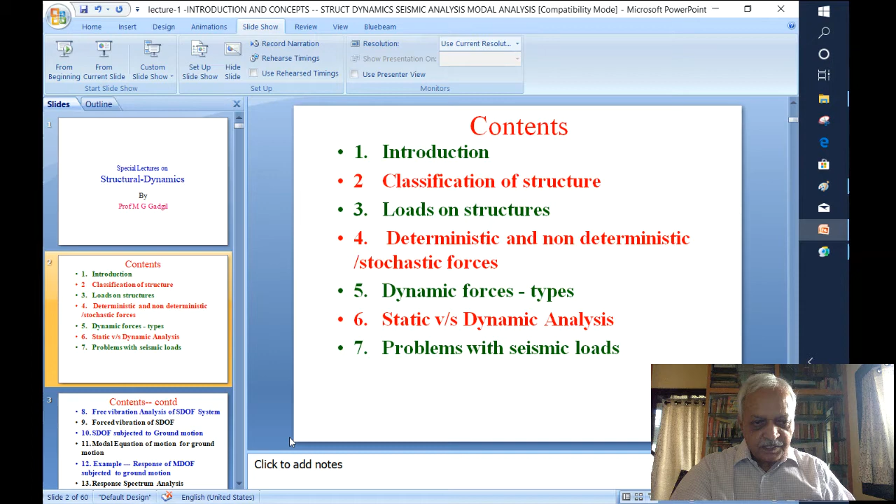My entire presentation today is going to cover the following topics. Firstly, I will give some introduction about the problem we are going to discuss. Then we will talk about classification of structures, the loads coming on structures, and deterministic versus non-deterministic or stochastic analysis of forces. We will discuss dynamic forces, the types of dynamic forces to be considered in structural analysis, and then static and dynamic analysis, the basic difference between the two.

The problem with seismic analysis will be discussed subsequently. Thereafter, a single degree of freedom system will be discussed in detail for its free vibration analysis. Then the forced vibration of a single degree of freedom system will be considered, which is an important step towards carrying out the seismic analysis of structures.

Then the single degree of freedom system subjected to ground motion will be discussed, which will later be extended to modal equations of motion for ground motion, that is, for a multi-degree of freedom system. A simple example will be considered for the response of a multi-degree of freedom system subjected to ground motion, wherein the analysis will be performed on the response history.

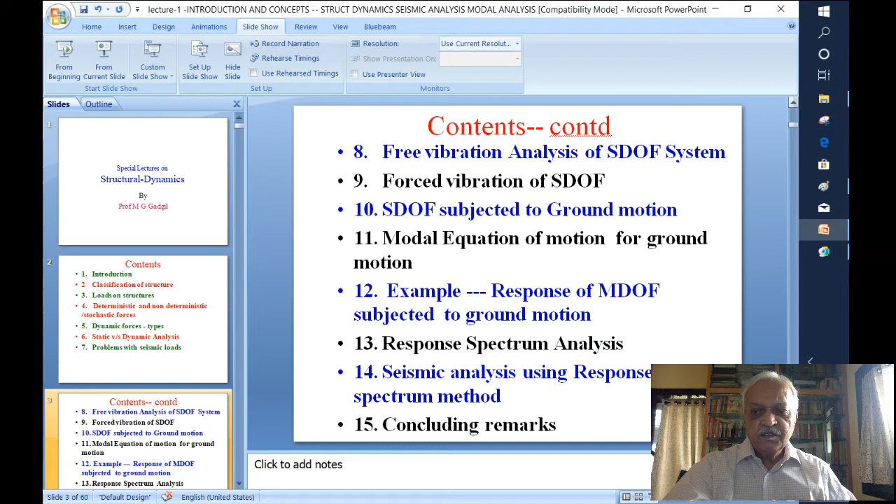Response history calculations and the response spectrum analysis will be introduced subsequently, and then seismic analysis using the response spectrum method will be discussed as a concept. There will be a problem solved completely using the response spectrum method as well as the response history analysis. So this is the overall guideline to be followed in the present lecture.

In the introduction, I am going to define the primary objective of structural engineering activity. The primary objective of a structural engineer's work is to plan, design, and detail a structural system which will safely carry the loads coming on it.

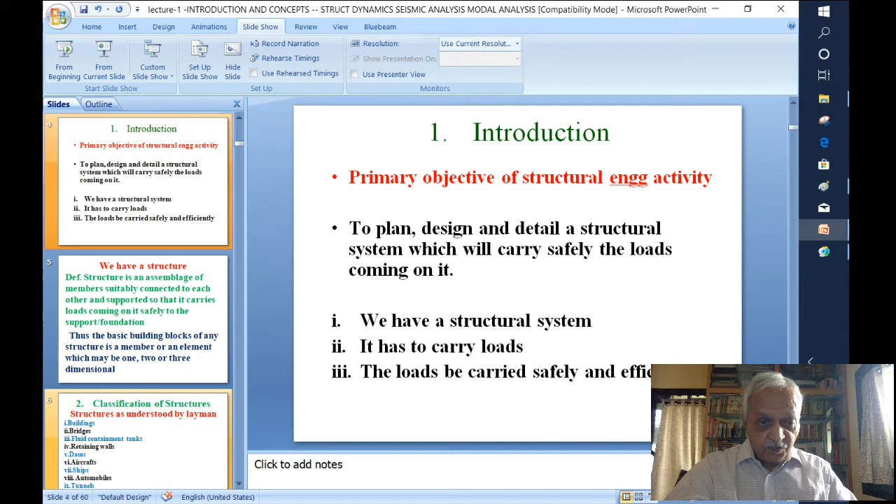If you look at this definition, it means firstly we have a structural system. Secondly, it has to carry loads. Thirdly, the loads have to be carried and resisted safely, so that the structural design meets the requirements of the end users.

Now, the first major activity of a structural engineer is dealing with a structure, so let us see what we understand by a structure. We say that a structure is an assemblage of members suitably connected to each other and supported, so that it carries the loads coming on it safely and carries the load to the foundation.

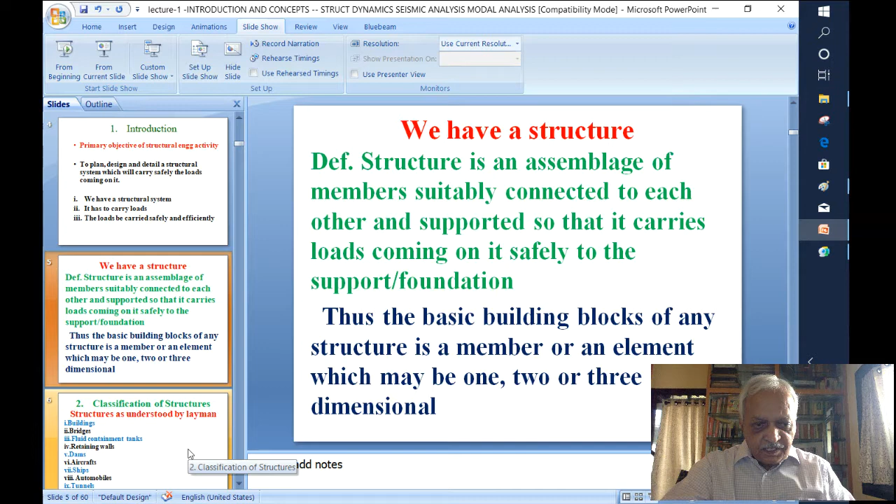This means the basic building block of a structure, whatever we have before us, is a member or an element which may be one dimensional, two dimensional, or three dimensional.

Now, when we consider the structure, a common man develops different images or understanding in his mind. For a layman, a structure would be buildings, tall buildings or medium-rise buildings, or bridges used for covering distance over roads or rivers, and then fluid containment tanks or water tanks.

Then we have retaining walls which are used to retain earth, and dams, massive structures which retain water on one side. Then we have aircraft which carry tremendous amounts of load and move from one place to another in air.

So the common man understands aircraft as a huge flying structure. Then there are ships, also understood as structures which float on water. Then we have automobiles mounted on wheels which carry loads, either in the form of cargo like truck carriers or oil tankers being transported on trucks, and then tunnels going through mountains for covering the distance between two places in the shortest possible manner.

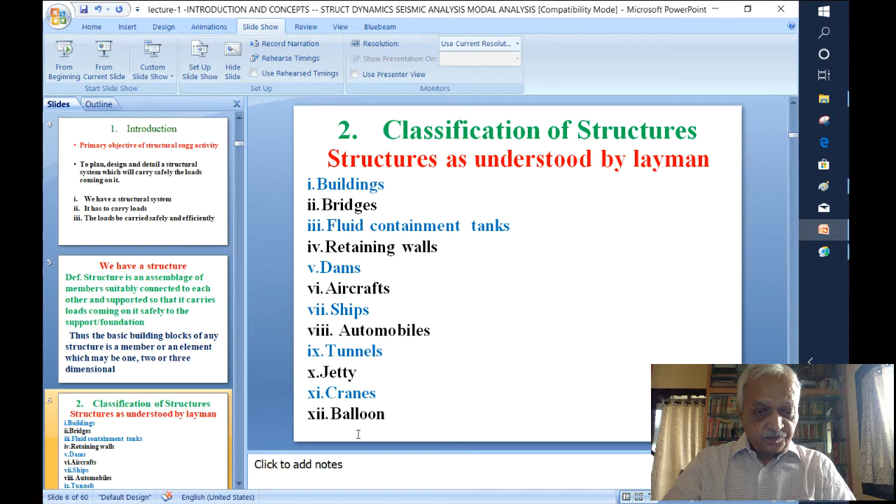So we have the tunnel with its lining, which must be properly designed to carry the loads coming from above, the soil above, and so on. Then we have the jetty, meant to berth ships at the shore. Then we have cranes, the tower cranes used in modern buildings, or the huge cranes in warehouses, and balloons or air-inflated structures, which have also been in great use over the years.

The classification of structure that we have seen is the way a common man understands it, while for an engineer, the structure carries different definitions or understanding.

An engineer may call a structure a beam, which is primarily a member subjected to transverse loads and carries bending moment and shear forces. Or a column, which is primarily meant to carry axial force and bending moments.

Then we have arches, which span large distances with aesthetic sense, carrying primarily axial force and some bending moment or shear force. Then we have cable structures, which are primarily meant to take only tensile forces.

Then we have trusses, either plane truss or space truss, where members are expected to take only primarily axial force. Then we have frames, either plane frame or space frame, where members are subjected to axial force, shear force, bending moments, torsional moments, and so on.

Then we have the floor grid system, which carries primarily the load in the direction perpendicular to the plane in which the structure lies. The floor grid system members carry bending moment, twisting moment, and shear force.

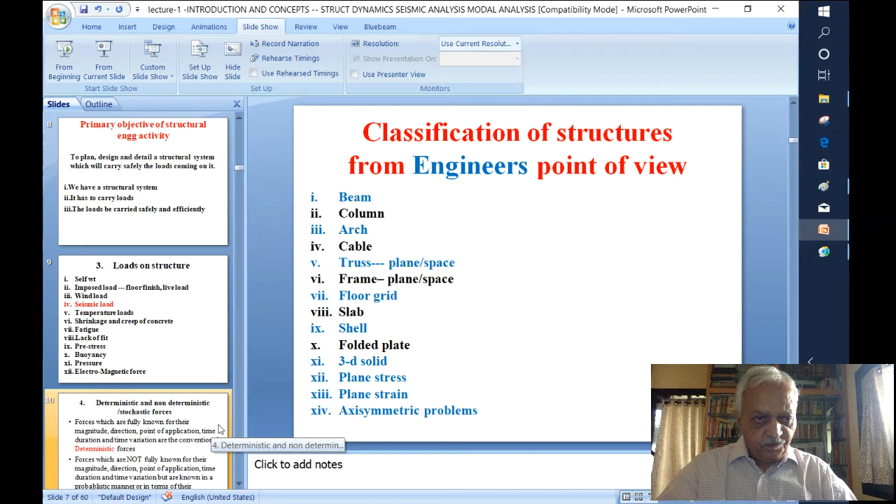Then we have three-dimensional solids, like foundation blocks for supporting machines or massive foundations below chimneys and so on. Then we have plane stress problems, plane strain problems, axisymmetric problems, and so on. So we see that for an engineer, the understanding of structure is different, while for a common man it is quite different.

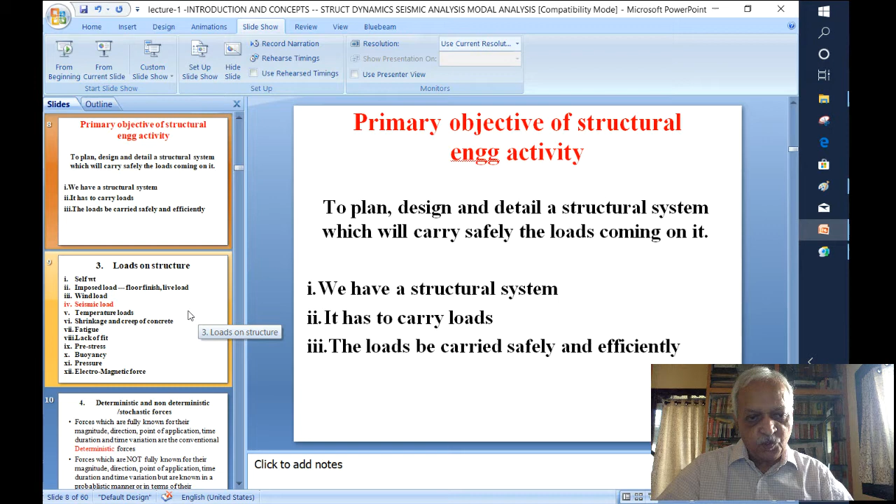Now, as far as the primary objective of a structural engineer's activity is concerned, we have a structural system, it has to carry loads, and the load is to be carried safely. So once we say it has to carry loads, let us see what kind of loads are expected on the structure.

The loads applied on the structure generally comprise the following list, though there might be a few more loads to be considered. We have the self-weight of the structure, which depends on the material being used. We have the imposed loads like floor finish or live load and so on.

Then we have the wind load, externally applied on buildings. We have the seismic load, generated due to disturbance at the ground level. We have the temperature loads.

Over the years, we see that the maximum and minimum temperature at any place varies by a wide margin. To that extent, the structure expands and contracts. So sometimes we have to consider the effect of this expansion and contraction in the design of the structure.

Then we have shrinkage and creep in concrete, which also develops additional internal forces that have to be considered in structures over a long period of time.

Then we have fatigue, which develops when rotating machines are supported by the structure, and due to the continuous development of alternating internal forces, the phenomenon of fatigue sets in, sometimes leading to failure of the structure.

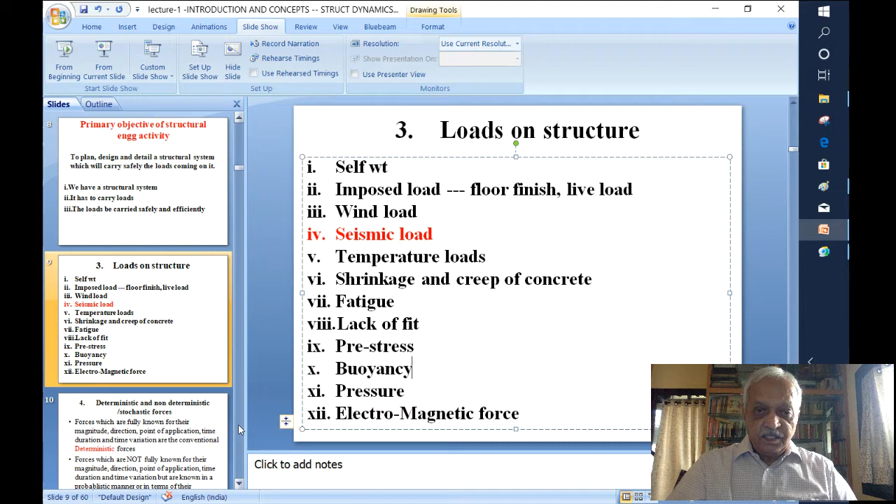And we have electromagnetic forces to be considered for structures like a transformer frame and so on, where a huge amount of current and the associated electromagnetic forces are developed.

Now that is the general description of the loads. Loads are further classified sometimes into two categories: the deterministic load and the non-deterministic or stochastic forces.

Deterministic forces are those which are fully known for their magnitude and direction, their point of application, the time duration, and the time variation. These are the conventional deterministic forces. So if everything about the force is known precisely, then we say that it's a deterministic force, and the analysis is then the deterministic analysis.

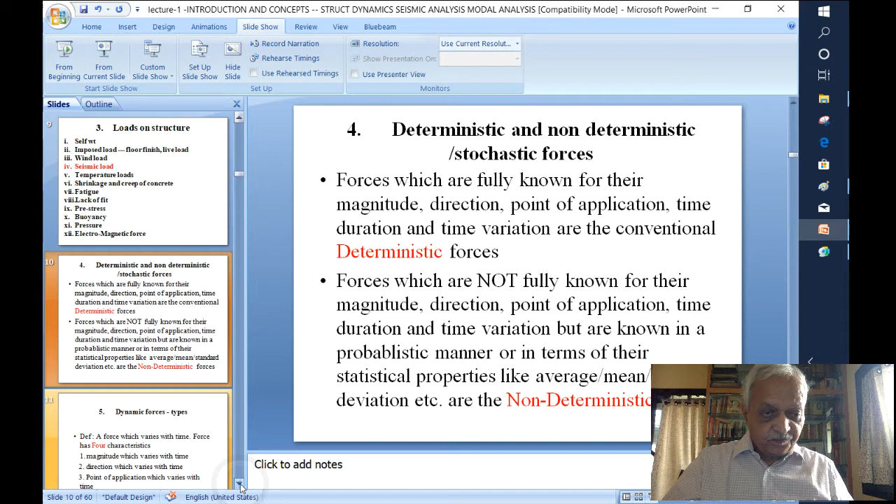Sometimes the force data is not precisely known. It is known in terms of some statistical properties. Forces which are not fully known for their magnitude, direction, point of application, time duration and time variation, but are known in a probabilistic manner or in terms of statistical properties like an average or mean or standard deviation, we call such forces as non-deterministic, and the analysis is then the non-deterministic analysis or stochastic analysis.

We further say that the forces we are considering, for most of the categories we have considered, are all static forces. But there are some situations where the forces are to be treated separately. A force which varies with time, we call a different type of force, because it induces a different phenomenon in the structure itself.

The force has got four characteristics. One, its magnitude, so you might have a force whose magnitude changes with time. The force has got a direction, so the force we are considering might be one whose direction changes with time. We also have to consider the force for its point of application. Now, if the point of application of the force also changes with time, like moving loads on bridges, then we say that is also a different type of force.

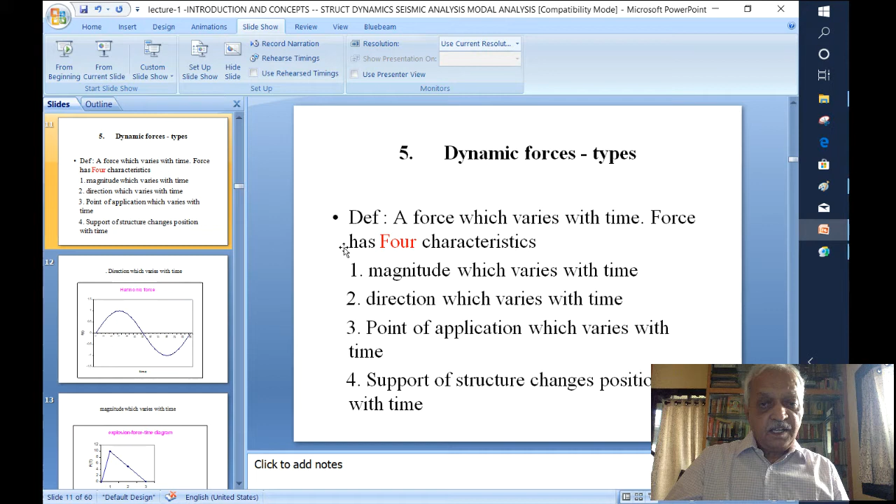And we sometimes have a situation where the support of any structure itself undergoes vibration or movement, as under seismic conditions, so we have to treat that type of force separately. These are the different types of variations we have to consider.

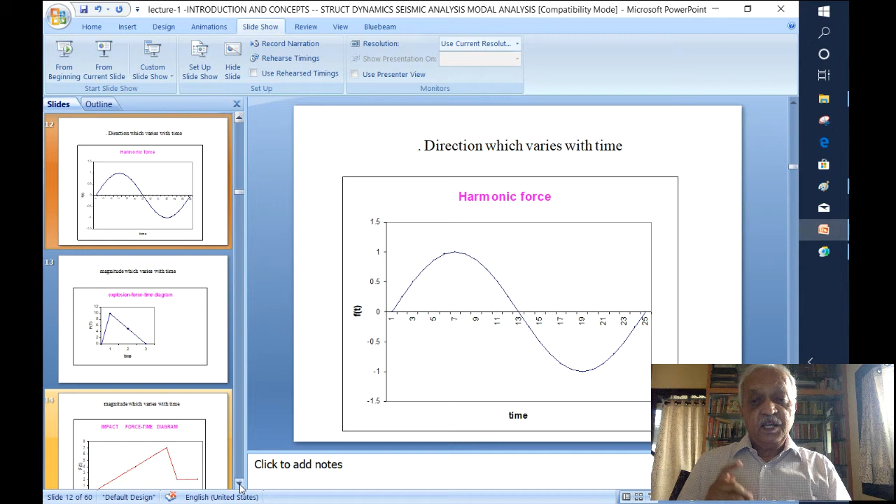Some of the force variations are now indicated. One is the harmonic force, which is developed many times due to rotating machinery supported on structures. The rotating machine can develop a force which changes with time in direction, but if you consider its component only in one direction, it can vary from a plus value to a minus value.

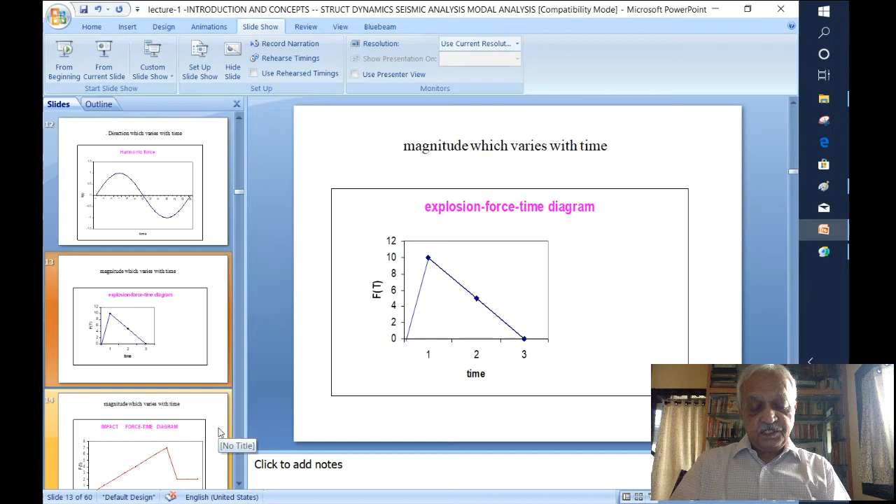Then we consider another type of variation, where the magnitude of the force varies with time, like an explosion. In an explosion there is a sudden buildup of force, and then a sudden drop in the magnitude of the force.

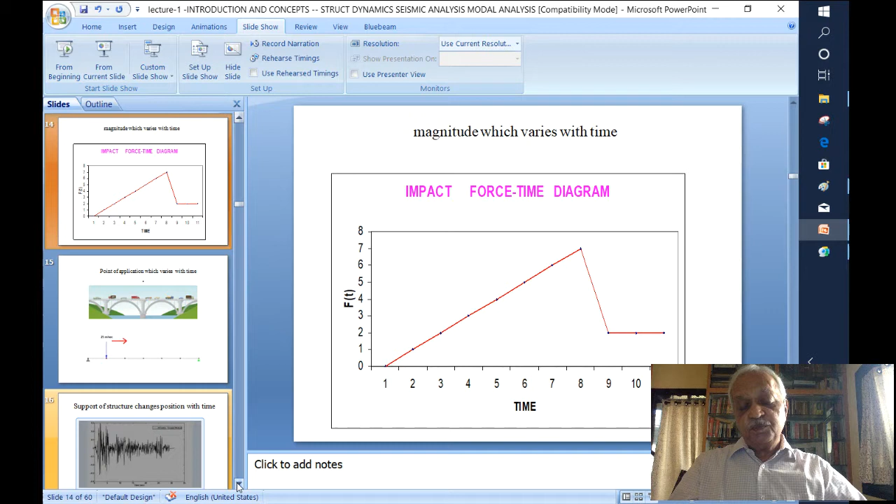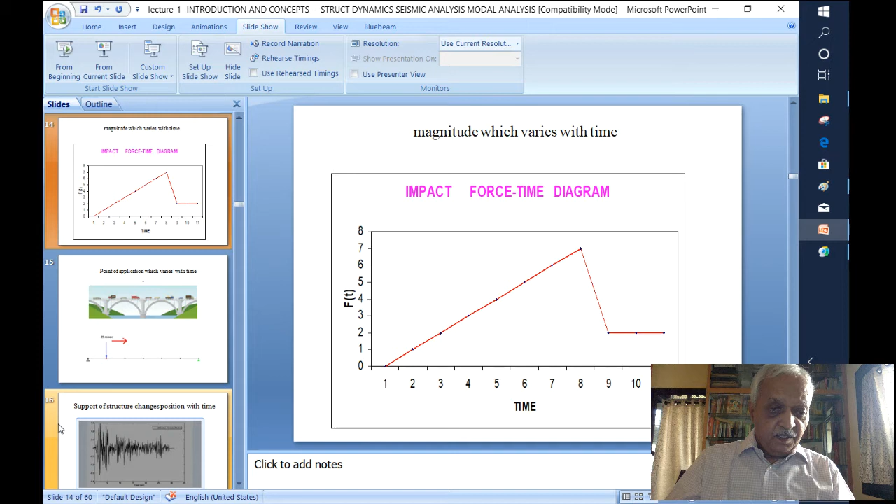So within a very short time, the entire process takes place, and the force varies with time in that fashion. Then we have another type of force which varies with time: the impact type of force. If a heavy object or a missile is thrown on a structure, it gives rise to a very large force within a very short time. Later, as the effect of that massive velocity of the falling object is reduced, it is only the weight of the missile which the structure has to resist. So we have a force which varies with time, but the entire variation is in a very short interval of time.

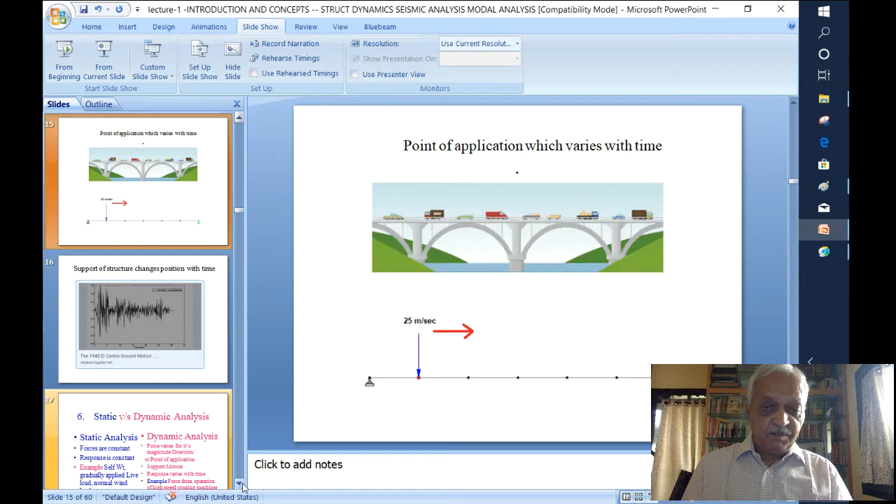Then we have a force which changes its position on the given structure: the moving loads. Now in moving loads on bridges, the vehicle continuously keeps changing position. So by the time the structure tries to develop enough reactions or internal forces, the position of the load changes. The result is that continuously the structure is subjected to displacements which are changing with time, giving rise to bending moment changing with time, and so on.

Then we have another type of force we have considered, which is the ground motion. So if you have a massive building resting on ground, and that ground itself shakes during an earthquake, that may give rise to enormous vibrations in the structure, and we will have to consider the effect of such vibrations in the analysis and design of the structure.

So far we have considered static type of forces or dynamic type of forces, the deterministic as well as non-deterministic. Now, once we say that forces can be static or dynamic, then the analysis will also accordingly be a static analysis or a dynamic analysis. In static analysis, as we see, the forces are constant.

The result of that is the response is also constant - your bending moment is constant, the shear force is constant, the deflection is constant, and so on. Examples of such types of forces are the self-weight, the gradually applied live load, or the normal wind load, which give rise to a constant force on the building, or if it varies very gradually so we don't have to consider its variation.

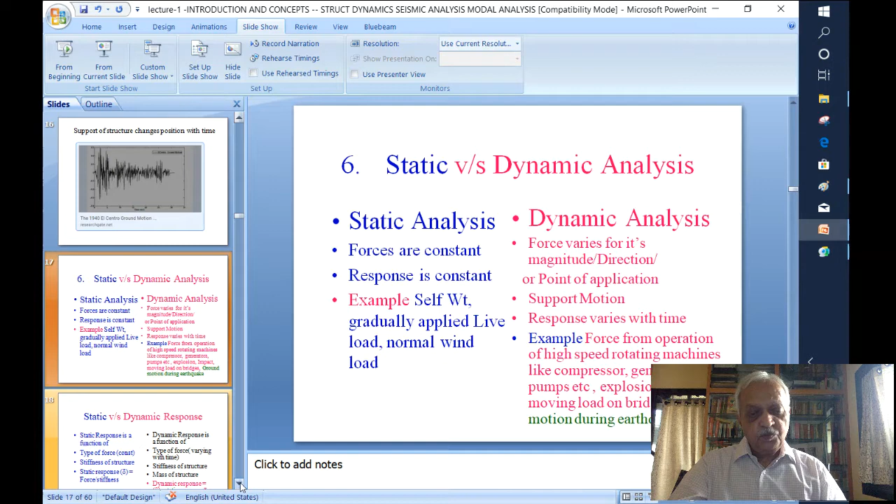Examples of such types of forces which we considered earlier are high speed rotating machines, compressors, generators, or pumps. Then we have explosions occurring in the vicinity of the structure, or impact, or in case of forging hammers, large amounts of impact forces developed at the foundation level. Then we have moving loads on bridges where the force changes its point of application continuously, and ground motion during earthquakes.

So we now see that static and dynamic analysis give rise to different types of concepts. The static response, when the force is considered constant, depends on the type of force - it may be UDL, or point load, or any other variation. The response of the structure depends on the stiffness of the structure. If the structure is very stiff, it will give some response in terms of displacements and so on.

The static response that we consider in terms of deflections is very simple for static analysis, and that is we have force upon stiffness giving rise to the static response of deflection.

In dynamic analysis, the dynamic response itself is a function of the type of force, that is how it varies - whether it's an impact type of force, an explosion type of force, or a harmonic force due to rotating machines. Depending on the type of force and its variation with respect to time, the response will change. The same force varying due to explosion will cause some response, but if the force is due to impact instead, it will give rise to another response.

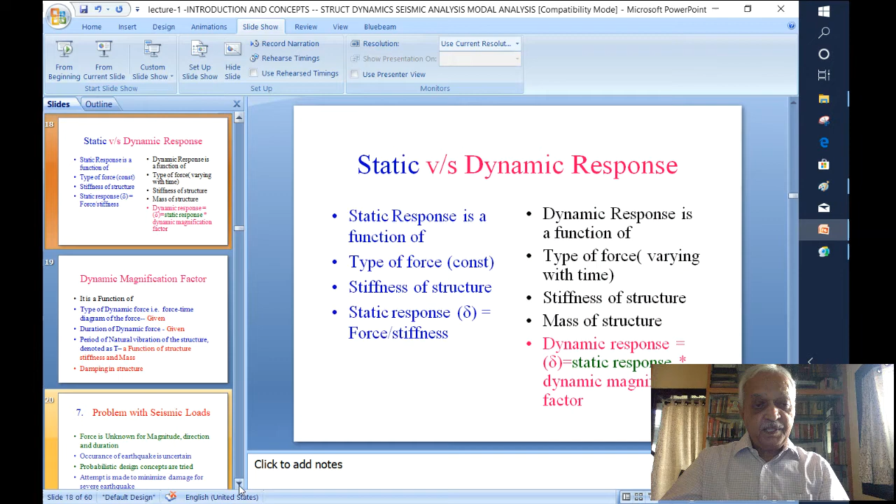The dynamic response, due to any dynamic force, will depend upon, firstly, if the same force is applied statically - there is some response generated by the structure - but if the force is applied dynamically, then the response gets magnified or modified. So the dynamic response is given by the static response if the force is applied statically, multiplied by a factor called the dynamic magnification factor. This dynamic magnification factor is the most important concept in dynamic analysis, because it indicates by what margin the response gets modified when considering the dynamic nature of the force.

The dynamic magnification factor depends upon the type of force - the same force applied as explosion, impact, or harmonic force will cause different dynamic magnification factors. Further, it depends upon the duration of the dynamic force. If the duration is too short, there is some magnification factor; if it is too long, there is another magnification factor.

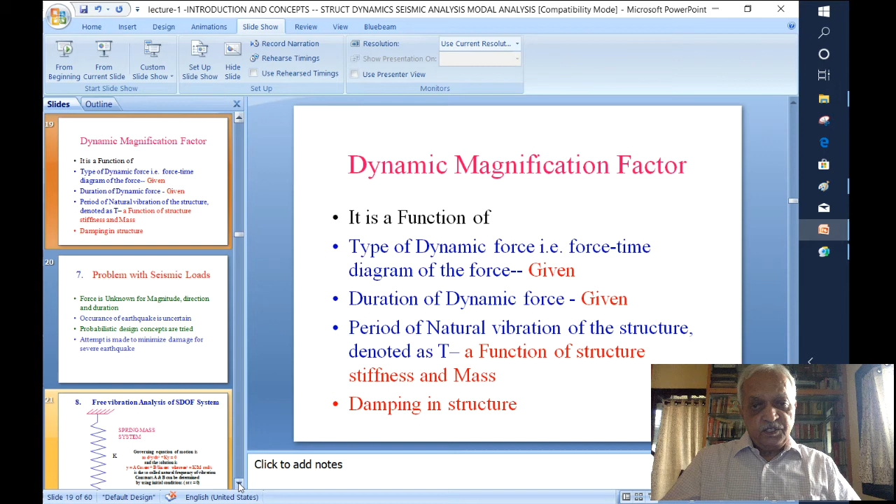It further depends upon the period of natural vibration of the structure, denoted as T, which is a function of the properties of the structure like its stiffness and mass. The dynamic magnification factor also depends on damping in the structure, which is the energy loss mechanism present in and around the structure. But we will not go into details, because many times its effect is small compared to an undamped structure that we otherwise consider. So that is all as far as the dynamic magnification factor is concerned.

Now we consider the force of importance for today's discussion, that is the seismic loads. Seismic loads are a very peculiar case of dynamic force. In case of all the loads we have been discussing so far, like an explosion, an impact type of force, or force generated by rotating machines, there is definite information about the force that we have to consider.

In case of earthquake, there is a lot of uncertainty. I don't know what magnitude of earthquake is going to hit the structure, in which direction the waves will be coming, and how long the earthquake will last. So that is all unknown. You have to only speculate or see the past history and take all those factors into account, then try to estimate what kind of force is to be considered. No precise information is available. The occurrence of earthquake itself is uncertain.

Sometimes during the lifetime of a structure, no earthquake might hit it, but nevertheless we have to keep a provision that if an earthquake really hits the building, it must withstand. So we have to consider the probabilistic method of design in this situation, as to what is the probability of the structure being hit by a very severe earthquake. We have to consider that, and the structure is to be designed accordingly.

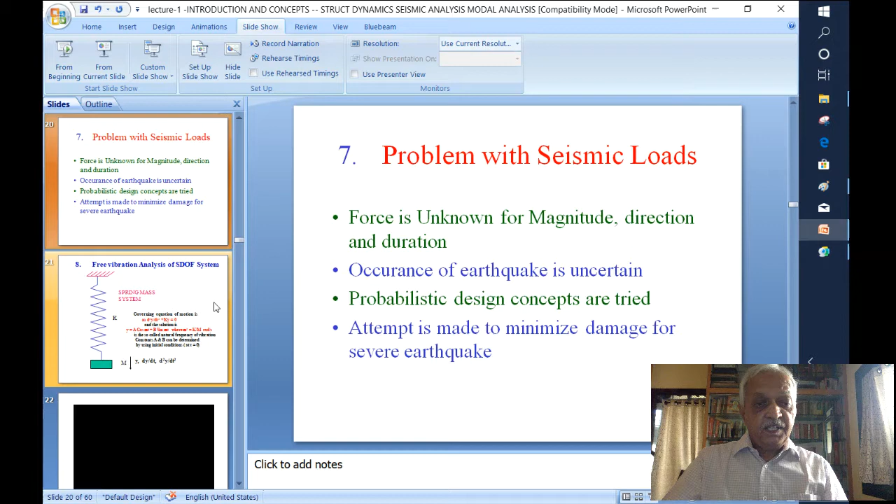We have to consider that the structure will generally resist certain intensity of earthquake in a safe manner. Some more severe earthquake can cause some damage to it, not leading to collapse, while other very severe earthquake might damage the structure to such a great extent that we may have to pull it down later and build a new structure. So our idea is always to see that minimum damage is caused during normal or moderately severe earthquake. The seismic analysis has got to be performed in a methodic manner, but the problems are quite different, and we have to consider probability of occurrence of earthquake, probability of saving the structure from complete destruction, and so on.

Having considered that, now let us consider the free vibration analysis of a single degree of freedom system. So we have this simple spring mass system. The spring has got a stiffness K, there is a mass M attached to it, and if this particular system is set into vibratory motion, we consider simple vibration of this spring mass system.

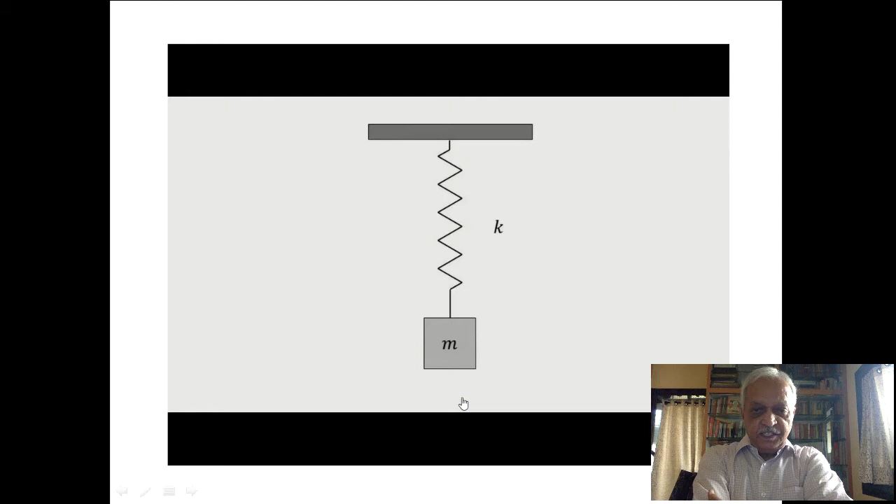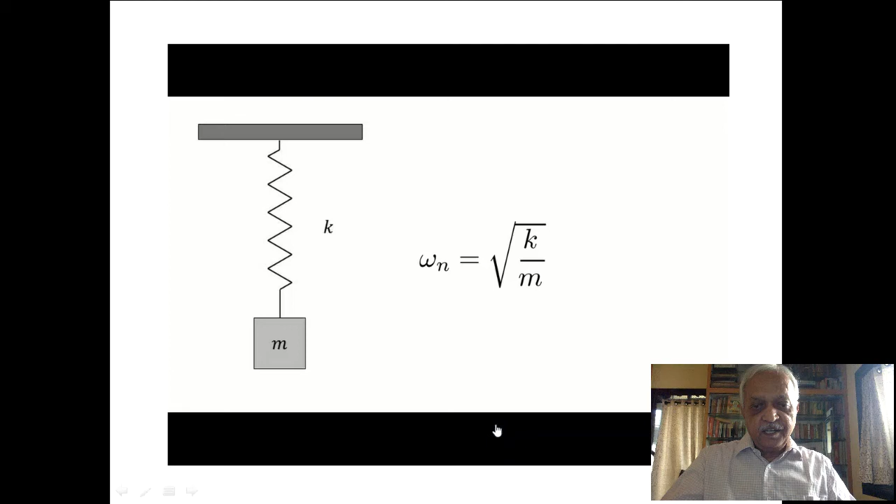So we will just consider the natural frequency of the spring mass system and see as a simple visual example how we can consider the vibration of a spring mass system. We will be considering a few springs over here, with different stiffnesses, and masses ranging from very heavy to very light. So we have three springs with three different masses, and if we consider the spring of stiffness K and mass M, we will see in a minute that the frequency of vibration is given by square root of K by M.

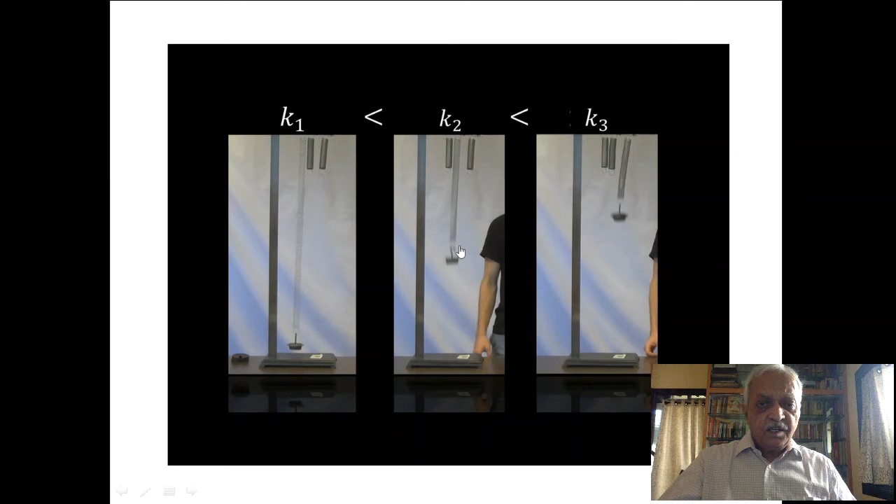So if I consider varying mass, meaning the same type of spring but different masses attached, here a very large mass is attached so it vibrates very slowly, because the frequency is given by root K upon M, so if the mass is in the denominator, it vibrates at a very low frequency. While if different springs are considered for the same mass, the spring which is very stiff will vibrate very fast, while that which is very weak will vibrate very slowly.

Now having considered that, let us consider the simple problem of a spring mass system for its governing equation. We have the mass M set into vibratory motion. The mass at any instant has a displacement from its static position by y, a velocity dy by dt in the downward direction, and an acceleration d2y by dt square, giving rise to the inertia force, mass times acceleration.

The tension of the spring is equal to the stiffness of the spring multiplied by its elongation y. So we have the inertia force m times d2y by dt square plus the elastic force ky, keeping the mass in equilibrium. So that is my governing equation of motion, or equation of equilibrium in dynamic state. This is a second order ordinary differential equation with constant coefficients k and m.

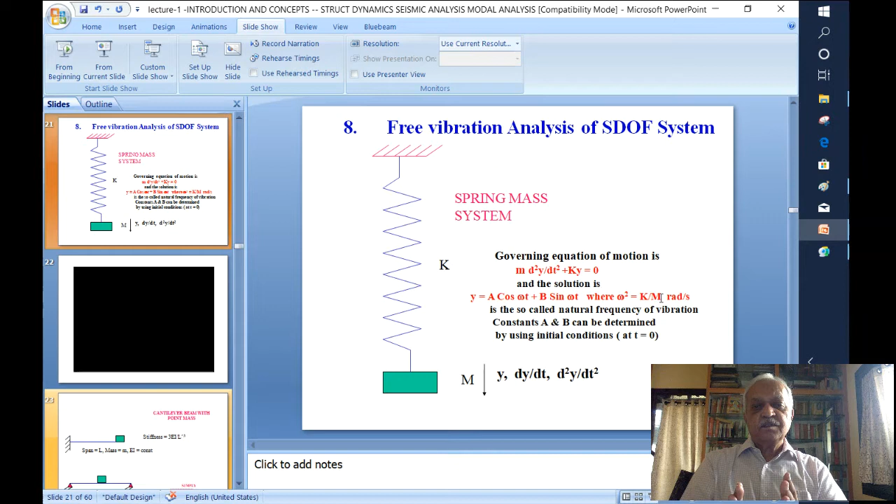The solution of this, without going into the details, consists of a cos omega t plus b sin omega t, where omega is the natural frequency of vibration, that is omega square equal to k by m radians per second, the so-called natural frequency of vibration. So we have this equation m d2y by dt square plus ky equal to 0, giving rise to a spring mass system, or from a spring mass system we have the frequency omega square equal to k by m. So we are deriving this equation for a spring mass system.

In reality, if we have a cantilever beam, we say that even a cantilever beam is a spring whose stiffness is the force to cause unit deflection, which in this case is 3EI by L cube. So I have the cantilever of span L, mass m, EI the flexural rigidity constant, giving a bending stiffness of 3EI by L cube, which is the stiffness to cause unit deflection at the free end.

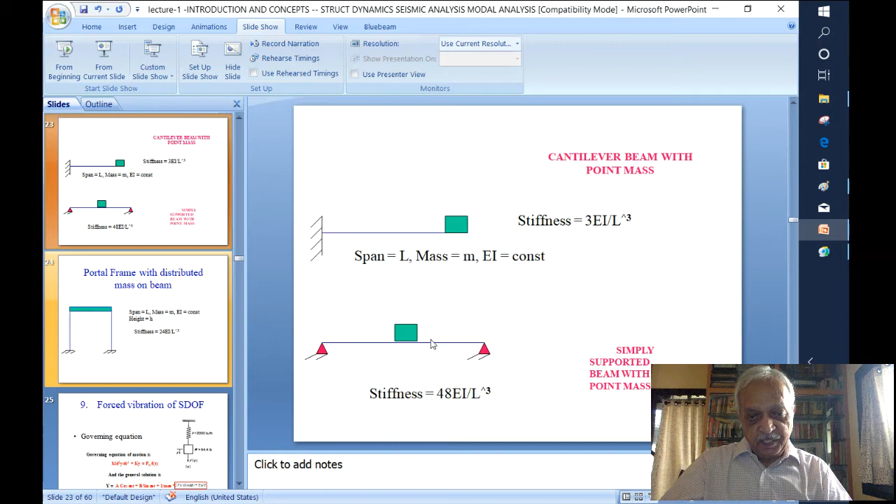Similarly, for a simply supported beam with point mass at the center, the stiffness is 48EI by L cube, that is the force required to cause unit deflection, which means it also has a spring characteristic of that stiffness.

If you consider a portal frame with a very rigid beam, we have columns of flexural rigidity EI, mass m at the top, and height of the column L. So the stiffness of this frame for lateral vibration is 24EI by L cube, that is 12EI by L cube for each column, and we have two columns.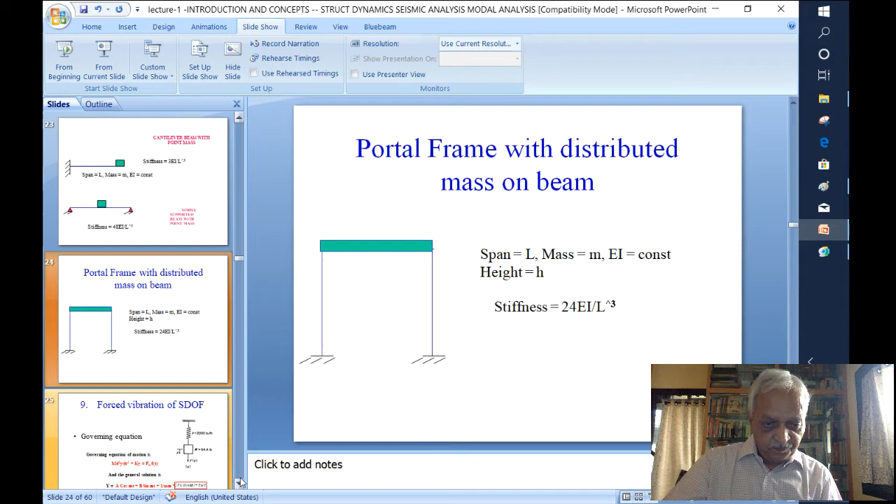So we say that any structure we consider has some stiffness and some mass. Accordingly, it will be a vibrating system later on when subjected to some disturbance, and it has some frequency of vibration which is a function of the stiffness and the mass.

Now we consider the same spring mass system subjected to some dynamic force. So now we have three forces: one, the inertia force; two, the elastic force in the spring, that is K into Y; and this external force F0 into F(t). So F0 is some reference magnitude, and F(t) is the time variation of that force.

The general solution for this, again without going into the details of its derivation, is a cos omega t plus b sin omega t, that is if there is no force at all, and due to the presence of the force we have 1 upon m omega times the integral of F(tau) sin omega(t minus tau), where tau is at any instant, going from 0 to t.

So we now have this spring mass system subjected to some dynamic load. If we know the variation of that force with respect to time, substituting that variation, we will be able to get the response of the structure subjected to that dynamic load.

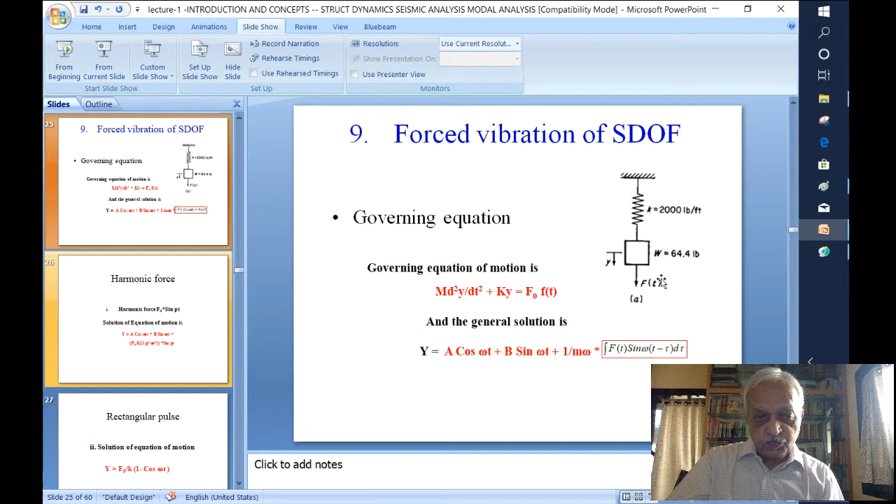So now if we have a harmonic force, substituting the equation for harmonic force, I get the solution as a cos omega t plus b sin omega t, that is the free vibration part, plus F0 upon K, the stiffness, times, inside the bracket, 1 minus p square upon omega square, times sin pt, where p is the frequency of that harmonic force.

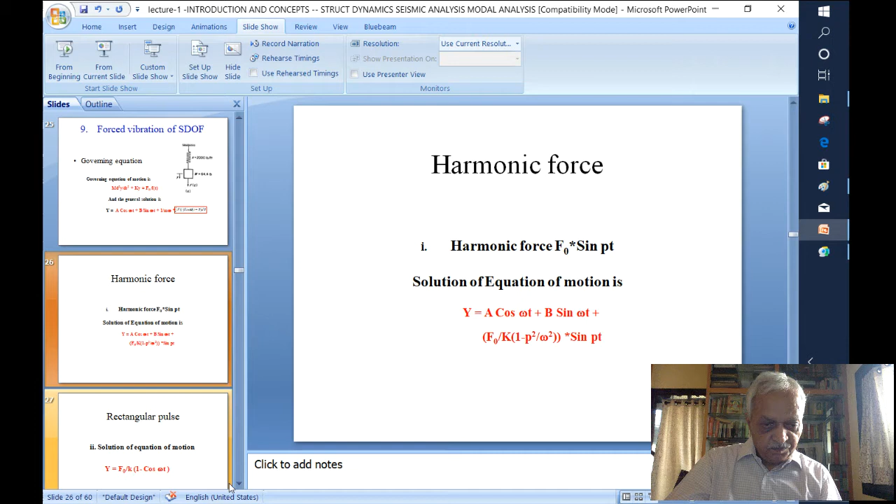So I might have a force which is applied at 100 rpm or 1000 rpm. Accordingly I will have this force with a frequency p, so many radians per second or cycles per second, giving rise to a response given by this equation.

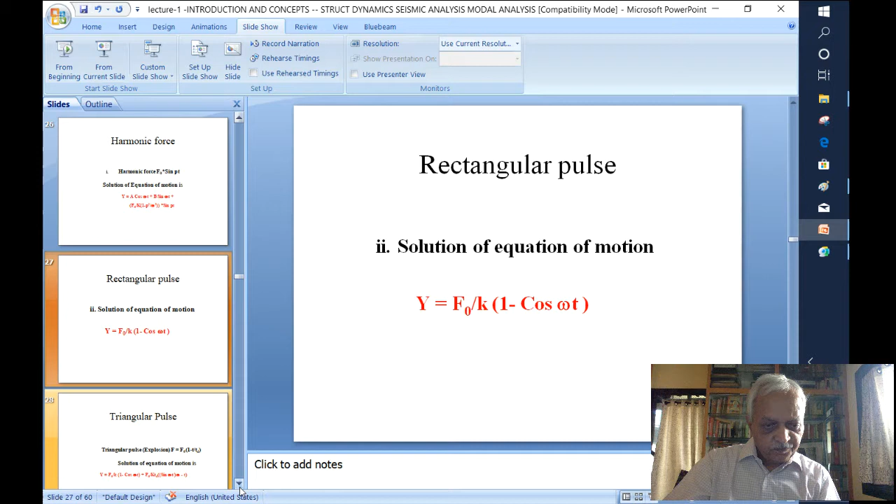If I consider the rectangular pulse applied on the given structure, that is a force which is applied over a period of small duration, say t, but that force remains constant for that time, and later on the force is 0, then F0 is the force which is now applied as a rectangular pulse. Then the response is given by F0 upon K into 1 minus cos omega t, that is the forced vibration part.

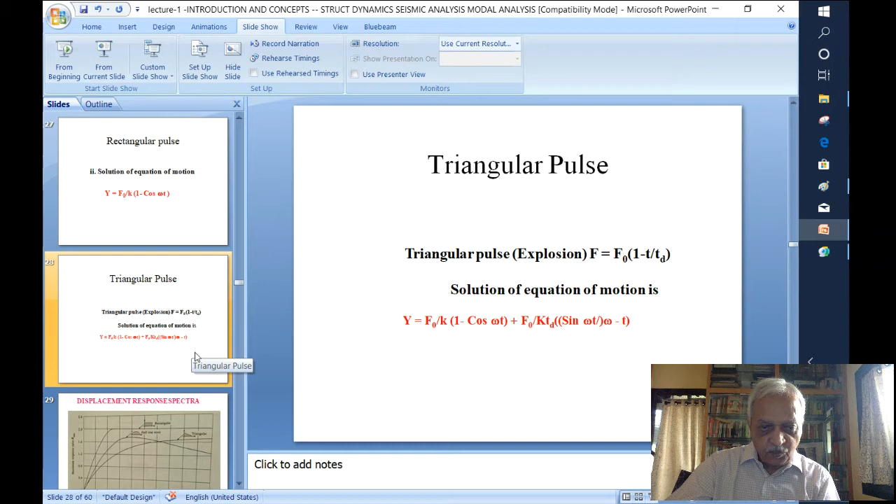The free vibration part of course remains the same. If you have got the triangular pulse applied, then the forced vibration part is F0 upon K into 1 minus cos omega t plus F0 upon K into Td, where Td is the duration of the force, into sin omega t, divided by omega minus t.

So we say that we have got this as the effect of different variations of the force, and if we summarize them, then we get the graph called the displacement response spectrum, which means for a spring mass system whose period of vibration is t, if you apply on it a rectangular pulse load, a half sine wave type force, or a triangular force, then the force-time diagram is now indicated over here.

On the y-axis we have the maximum response ratio, that is Rmax over here, that is your maximum dynamic response to static response ratio. So for rectangular pulse that ratio is 2, while on the x-axis if you consider it is the ratio of T1 upon T, that means in how much time you will be getting that maximum response.

So for rectangular pulse, roughly at that ratio of 0.5 you will be getting the maximum response, which means if the period of vibration of the structure is, let us say, 1 second, and if the rectangular pulse lasts for half a second, the full response, which will be twice the static response, that will be obtained.

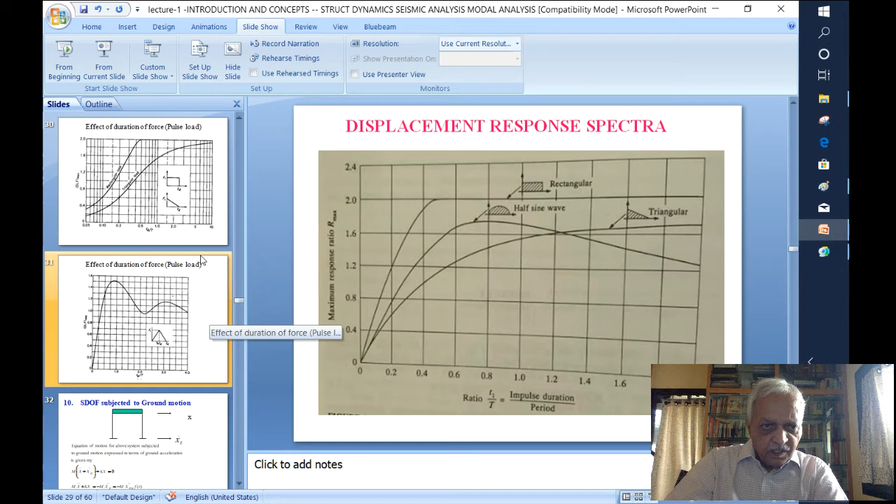Similarly, we have got the half sine curve, which is having a maximum response ratio of about 1.7 or 1.65, and we have the triangular pulse going from maximum to 0 in the end, giving rise to a maximum response of about 1.6 or 1.65. So we say that this is the way the response can be represented for dynamic forces over here.

If you consider a pulse like this, the force goes from 0 to maximum and then maximum to 0 again. And if we see on the x-axis the time duration Td upon the period of vibration, and on the y-axis we consider the dynamic load factor maximum, which means the ratio of the maximum dynamic response to the response of the same force applied statically, we see that the maximum ratio that we get over here is about 1.5.

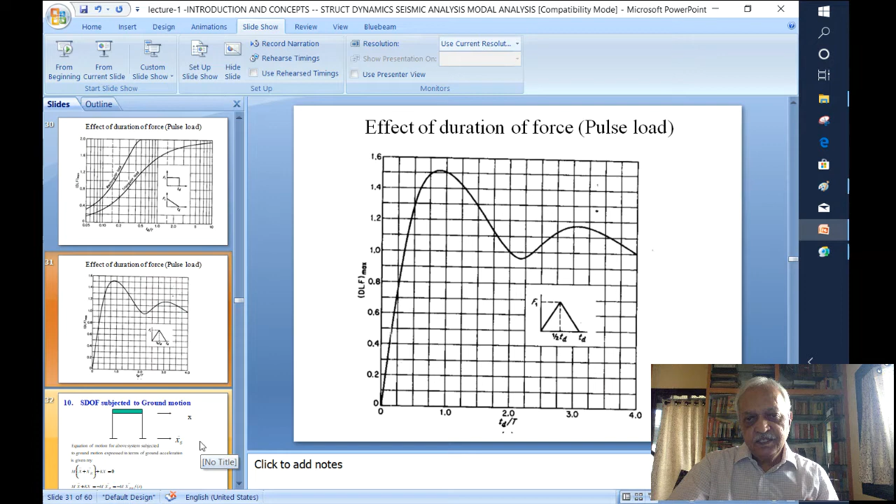So for a triangular pulse, if the pulse remains for Td upon T equal to about 1, then we say that almost maximum response is obtained. But if Td upon T exceeds 2, 3, or 4, then we see that the response is not dynamic, because the structure is subjected to load which is varying very gradually and then drops down. So we say that there the dynamic nature is now more and more diminished. The result of that is we get a dynamic load factor which is almost 1 when the ratio is 4, and so on. So that is as far as the effect of duration of the force which is a pulse type force.

Now we consider a single degree of freedom system subjected to ground motion.

So far we were considering either the free vibration or the forced vibration of the single degree of freedom system. Now we consider forced vibration of a different category, that is developed due to the ground motion.

We represent the ground motion as x double dot g, the acceleration which varies with time, and x as the displacement of the mass which varies with time. We have the inertia force as mass multiplied by the relative acceleration x and the acceleration of the ground taken together, giving rise to total acceleration, while k into x is the spring force, or the force in the columns, due to the relative displacement x.

We consider terms on one side, that is the system generated forces. The acceleration x double dot is the relative acceleration, k into x is the relative deflection, and m into x double dot g is the ground acceleration due to earthquake and so on, which is represented in terms of some reference value of ground acceleration into variation with reference to time.

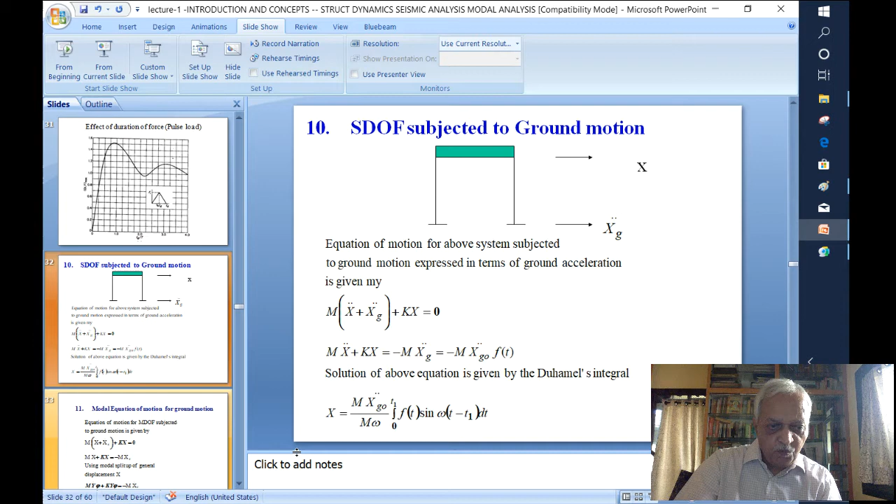If we have got several masses, like a multi-story building, at each floor we have got a mass, and if I want to write down the equation of motion for that, then for each mass I will have to write down one equation, because it has got separate displacement, separate acceleration and so on. So I will have several masses, several displacements, several accelerations, and several springs.

So with all that, now I consider this as a matrix equation. I have got a mass matrix which represents all the masses in the system. X double dot is the acceleration matrix for the masses, k the stiffness matrix for the structure, x the displacement vector for different degrees of freedom. We have m, the masses to be considered in the structure, also a mass matrix, and x double dot g is, of course, the ground acceleration.

Usually when we have got such a large set of equations, one way of splitting the equation is to use the modal analysis concept, which we will not discuss in detail, only indicating that if the structure has got 100 degrees of freedom, then there are 100 independent modes which we can consider for the structure, and for that structure any arbitrary deflection that it otherwise undergoes or experiences can be split into modal deflections and their addition.

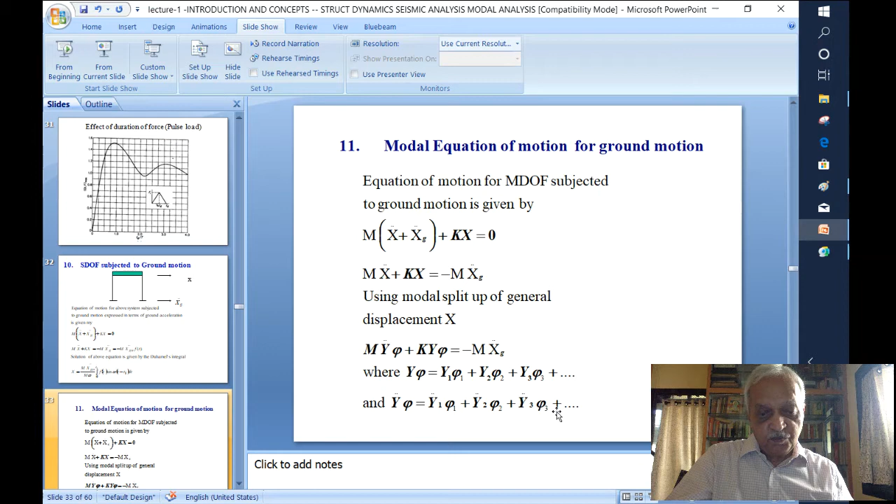Same thing applies to the acceleration vector. So any general acceleration can be considered to be made up of acceleration corresponding to the first mode, corresponding to the second mode, corresponding to the third mode, and so on and so forth.

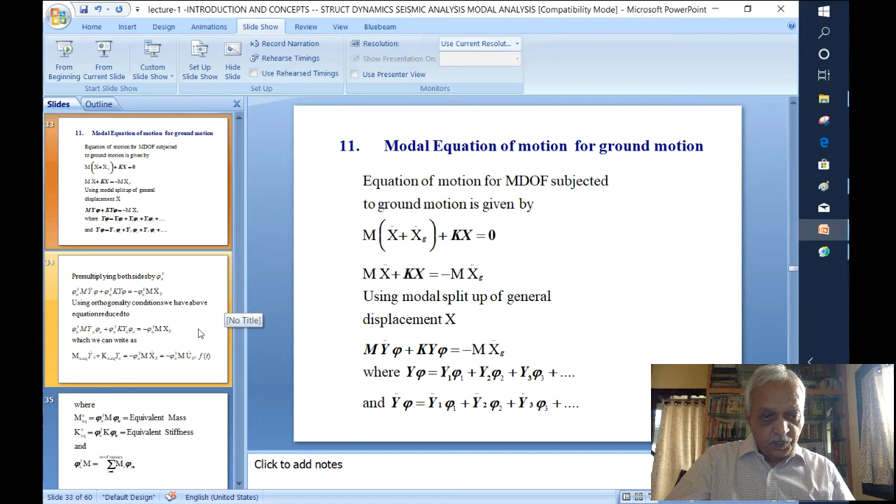So our entire concept is to split the overall response in terms of modal response and then consider its addition, and so on. So we now consider the same equations with this split-up of displacements and accelerations, and pre-multiply them by the mode shape for the nth mode.

So phi n transpose is applied to the split-up of the modal acceleration and the split-up of displacements, and on the right hand side I am multiplying by the same phi n transpose m into x double dot g. Using orthogonality conditions and so on, we will be able to reduce the equation to one single term: phi n transpose m into y double dot n multiplied by phi n, which is also the modal vector.

Accordingly, we now get phi n transpose m phi n as m equivalent, that is the equivalent mass, phi n transpose m into phi n. Y double dot n is considered as a separate term. So I have got these three terms combined into this equivalent mass, these three terms giving rise to equivalent stiffness, and these terms on the right hand side, phi n transpose m into x double dot g, retained as they are: phi n transpose mass, and x double dot g is taken as the reference value of acceleration into the time variation of the ground acceleration.

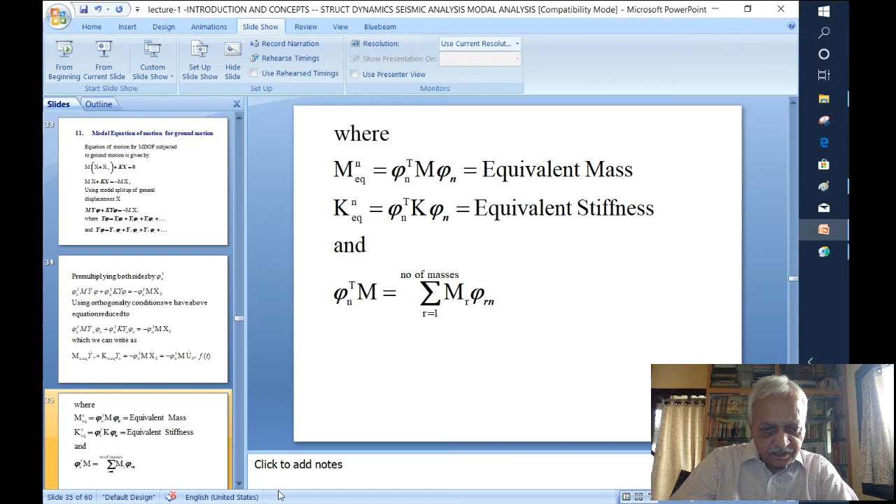So we now consider for this the equivalent mass M equivalent as phi n transpose M phi n, equivalent stiffness as phi n transpose K, and on the right hand side phi n transpose M, as that is the summation of all the masses for that particular mode, and so on.

Now we consider the response of the structure which we have defined earlier, that the total response in dynamic state consists of the static response multiplied by the dynamic load factor.

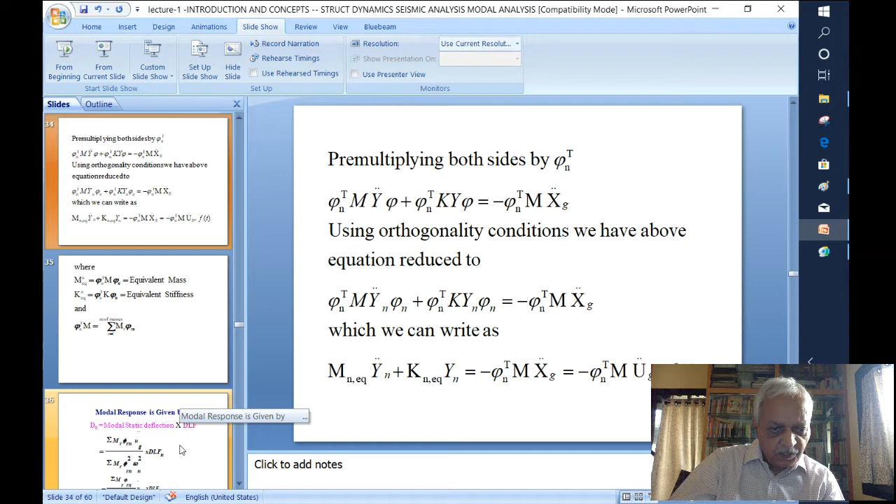So in this particular equation the static response is considered by taking the force upon the stiffness. So the static response is given by the force on the right hand side, and in the denominator we have the stiffness.

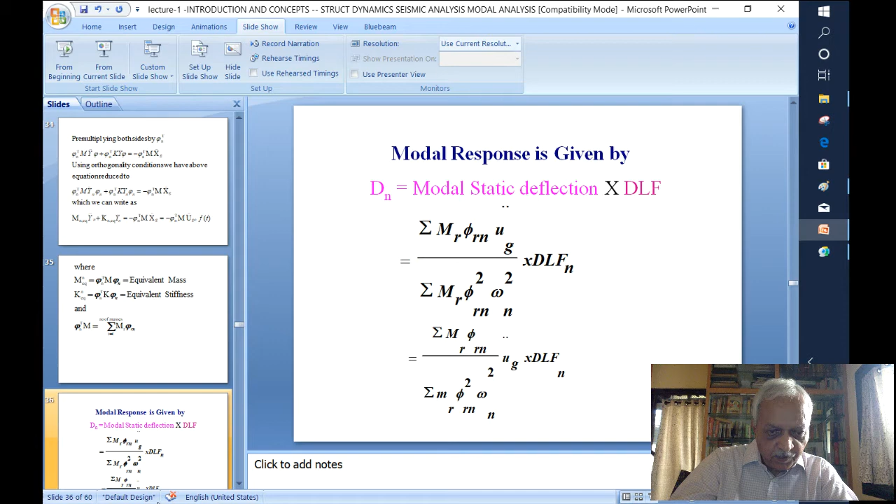So we now say that the dynamic response for that mode consists of the static response multiplied by the dynamic load factor, which we have to consider for the dynamic nature of the force.

If I want to get the acceleration from displacement, because the system is vibrating, then we say that for simple harmonic motion the acceleration is omega square into x.

In reality the structure is not vibrating at a specific frequency, but if I am considering analysis in the first mode, I will say that though the structure is not vibrating in the first mode, I will still multiply it by the frequency of the first mode and call that quantity the pseudo acceleration of the first mode.

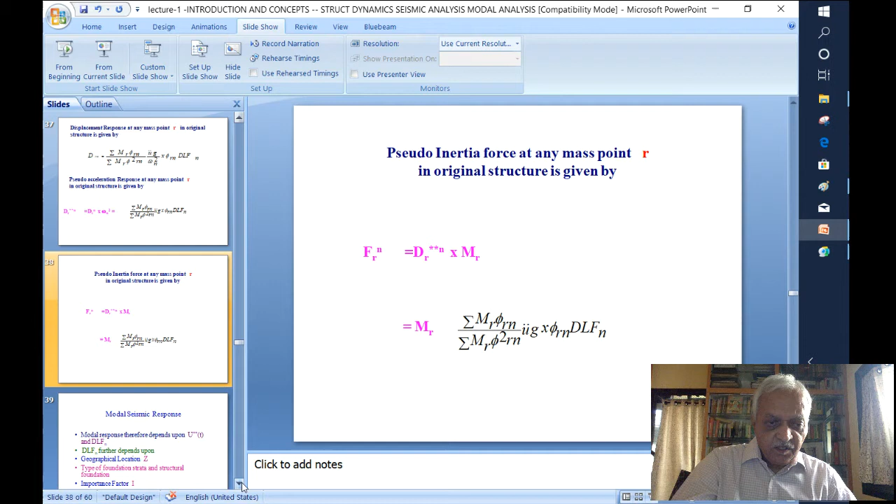So I have the mass at the rth point multiplied by the pseudo acceleration, which is obtained from the earlier analysis of displacements, multiplying it by frequency square.

So we now say that the value of the pseudo inertia force can be worked out, and this pseudo inertia force can be applied on the structure so that the response of the structure can be determined.

So if I want to determine the response of the structure, these are all the fixed terms. There is the ground acceleration which I will have to consider depending upon the ground motion being considered, and the dynamic load factor, which I will have to determine depending upon the displacement time diagram supplied to me for the earthquake.

So all of that is going to give me finally a dynamic magnification. Now the magnification in case of seismic analysis will depend upon the probabilistic concept as to whether, in that area where we have the structure, many earthquakes have occurred.

So our country is divided into different zones and some zone factors are indicated, depending on whether it is resting on firm strata or very loose strata, because that will generate different kinds of local motion. So I will have to consider what type of soil strata is there.

Further, for a given structure, I will have to consider the importance of the structure, as to how much safety margin I will need, and what will be the effect of collapse of the structure, whether it will lead to large loss of life and so on. All those factors go into determining the importance factor.

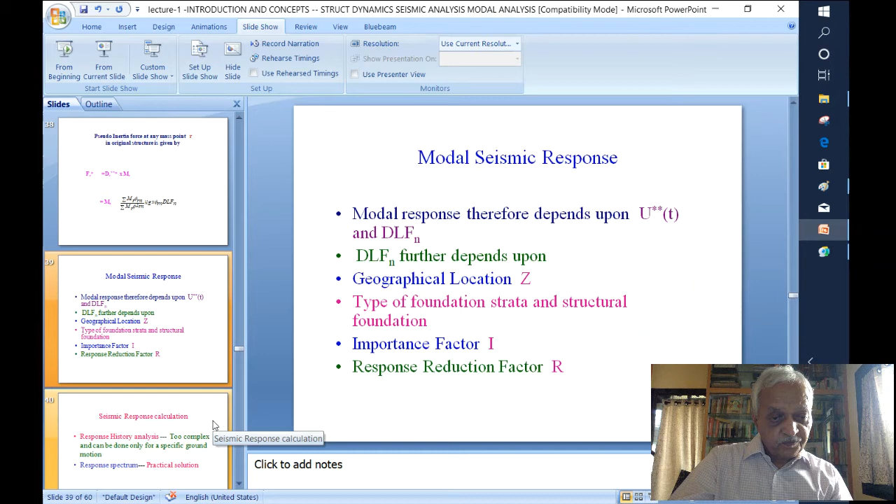So what I will do is take the severeness of the earthquake, use a reduction factor R, and say that my structure would remain elastic for that fraction of the ground motion. If a severe earthquake occurs, I will say let my structure get somewhat damaged, but if I reduce my ground motion by a factor R, then for that reduced ground motion, my structure must remain elastic. So I am using this response reduction factor, which is a concept given in the code itself. We have to consider all these factors to finally get the response of the structure.

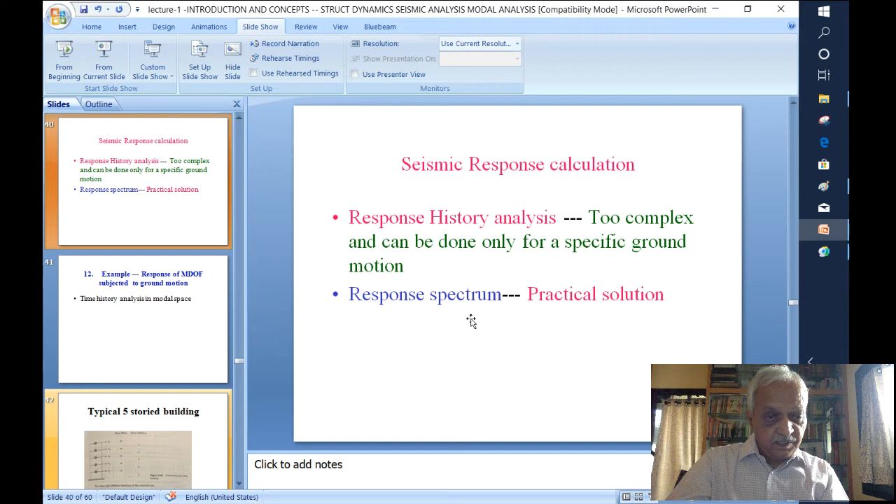Now to determine the dynamic magnification factor, I would have to carry out the detailed dynamic analysis or the time history analysis, which will be too complex. So every time I may not be able to do it, or it may be tedious for anybody to do it. So there has to be some other method, and that other method is the response spectrum method, which we will see in detail subsequently.

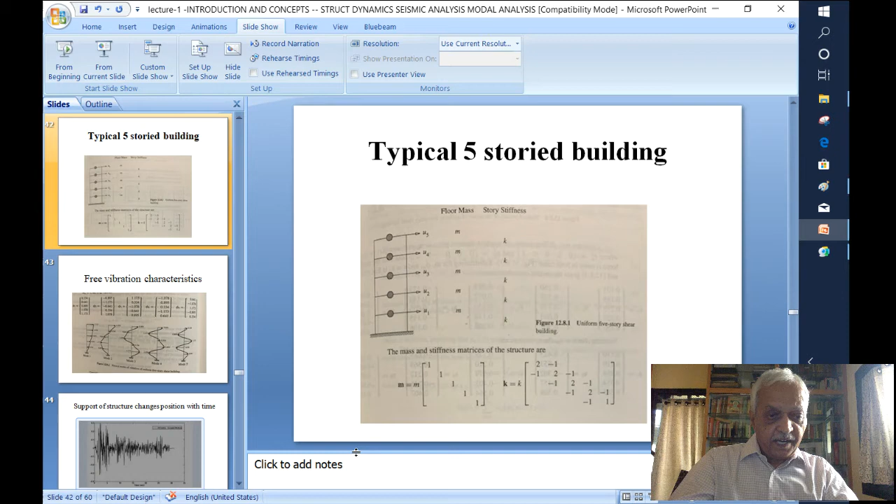So we will consider a very simple example where time history analysis in modal space is considered. Say we have a structure which is a 5-story building, with masses at these 5 locations, and each story has some stiffness. So I have this mass matrix and this stiffness matrix. Using that, I will consider the free vibration analysis and determine its frequencies of vibration and mode shapes.

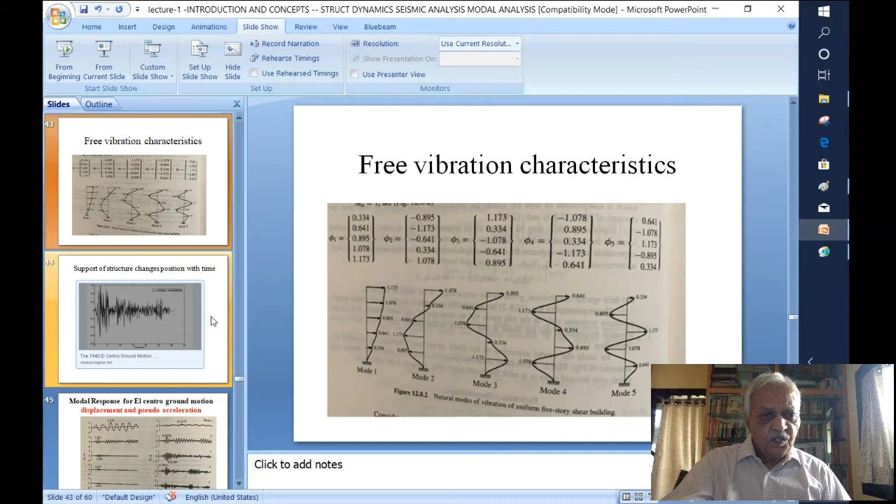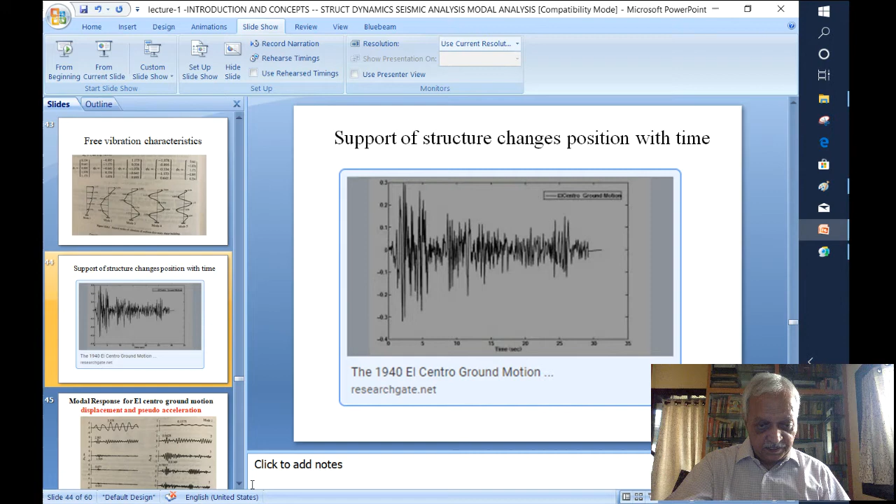Having considered free vibration analysis, for carrying out seismic analysis, we require ground motion. So this ground motion is now considered, which is the north-south component of the El Centro earthquake, which occurred in 1940 in California, USA. For this ground motion, for this structure, for every mode, the time history analysis is carried out, and the results are indicated in this particular graph.

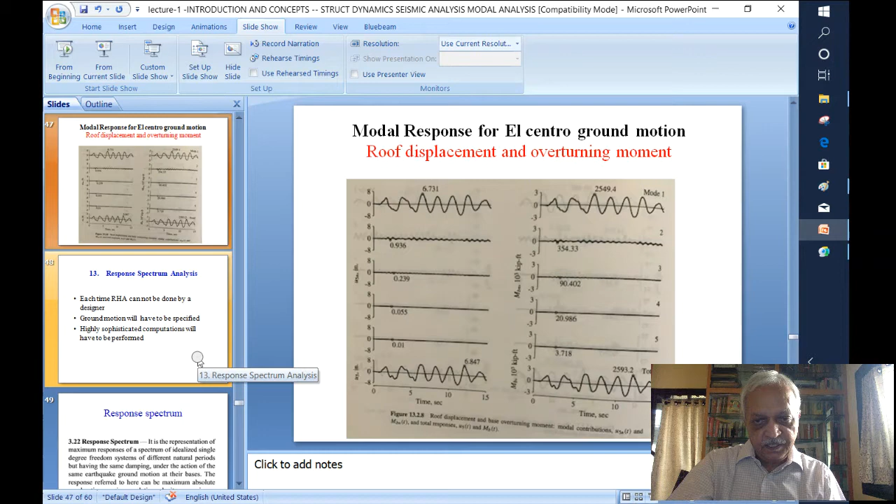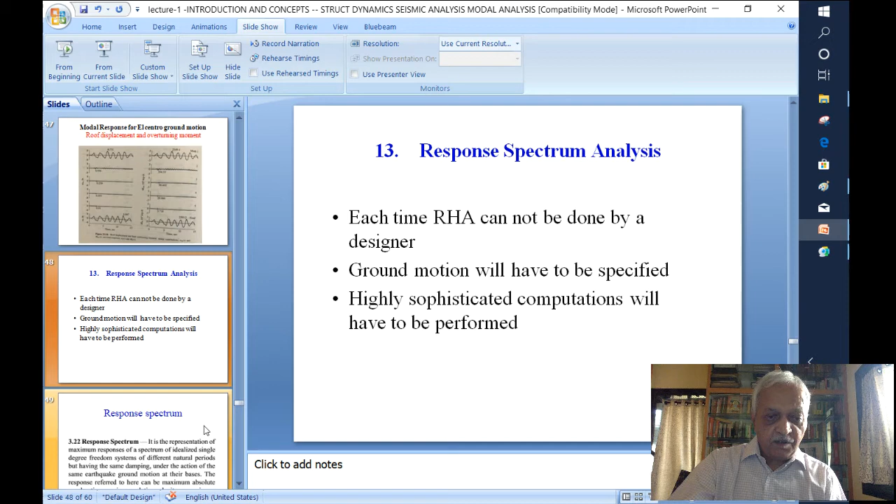That is a very time-consuming process. To circumvent this mathematical difficulty, a response spectrum is now considered, and response spectrum analysis is introduced. The response history analysis is very difficult, so each designer is not expected to carry it out - only researchers or academicians can do that. We would also have to indicate for which ground motion to consider it, requiring highly sophisticated computations.

To circumvent that, the response spectrum concept is introduced. In response history analysis we get the entire time variation of a specific quantity, say displacement or overturning moment. But as an engineer we are not interested in the entire variation - we are interested in knowing only the maximum. It might generate thousands of values, but I don't want that. I want the maximum, because my structure has to withstand the maximum of that response.

So if someone takes this task and carries out time history analysis for any ground motion, a team of academicians or engineers spend a lot of time getting the response to a specific ground motion for a structure with one period of vibration, another period of vibration, and so on. If several periods of vibration are taken for that single degree of freedom system, and a table or simple graph is produced showing the variation of maximum response for different periods of vibration...

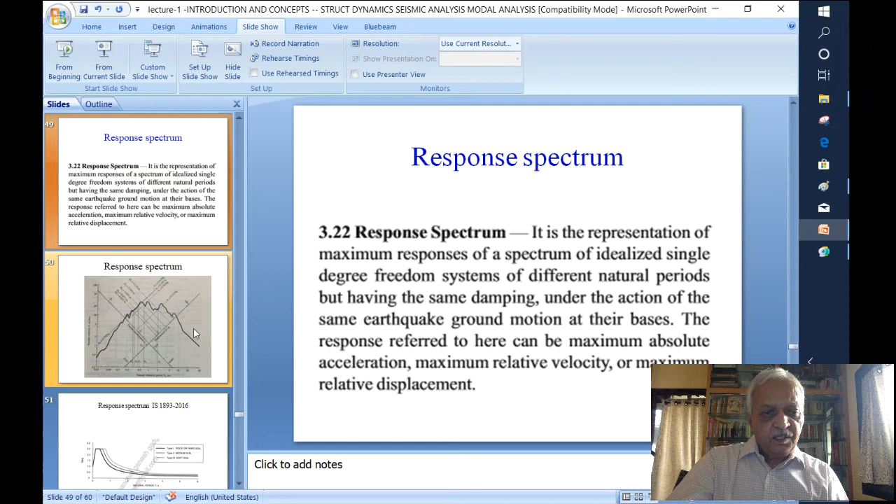This variation is represented and named as the response spectrum. It is the representation of maximum response of a spectrum of idealized single degree of freedom systems of different natural periods, but having the same damping, under the action of the same earthquake ground motion at the base. The response referred to can be maximum absolute acceleration, maximum relative velocity, or maximum relative displacement. If that graph is available, our task becomes very simple.

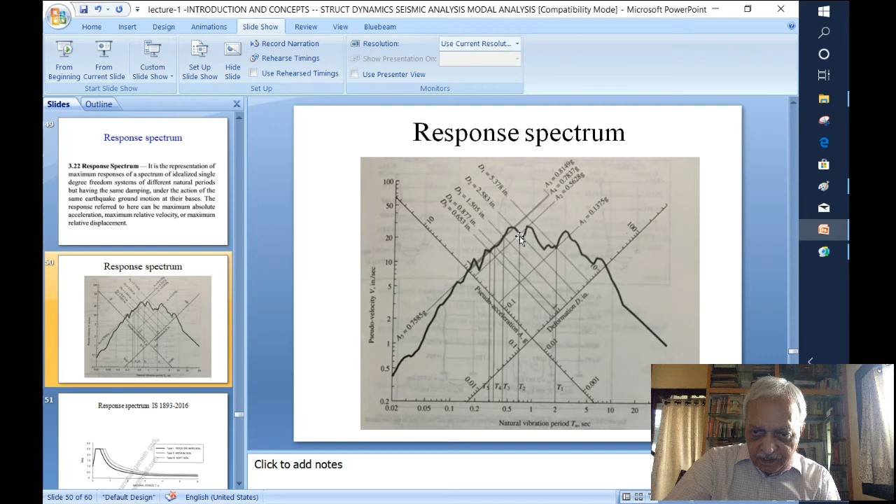If I have got a structure with some specific period of vibration, I take it up to the curve. From this point, on this side I have got the displacement, so I know so much is the displacement. If I project it on this axis, I get the pseudo acceleration, and if I project it on this axis, I get the velocity, pseudo velocity. So this response spectrum gives me, for a given period of vibration, the maximum displacement, the maximum pseudo acceleration, or the maximum pseudo velocity.

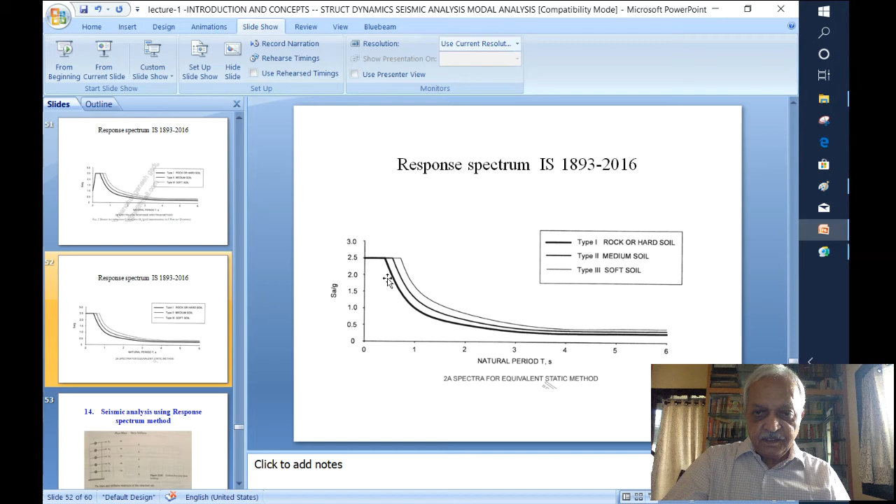The IS code also gives a similar curve. On the x-axis we have the natural period of vibration, on the y-axis we have SA by G, which is the acceleration of the structure normalized to G, a value we require in that particular equation. With this curve, if I know for a given structure its period of vibration, I don't have to go to response history analysis, because someone has already spent a lot of time on that, giving me this graph which provides SA by G for a given period of vibration, which I can use to calculate pseudo inertia force, pseudo bending moment, or pseudo overturning moment. Another curve is also given by the IS code, which is the response spectrum for the equivalent static method.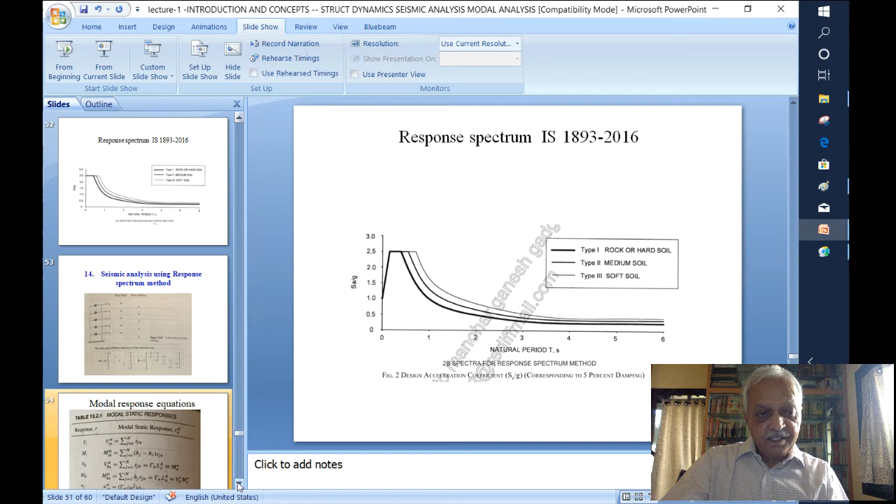The earlier one was for the response spectrum method. So depending upon the method that you are considering, you can use that specific curve and then determine the maximum response of the given structure.

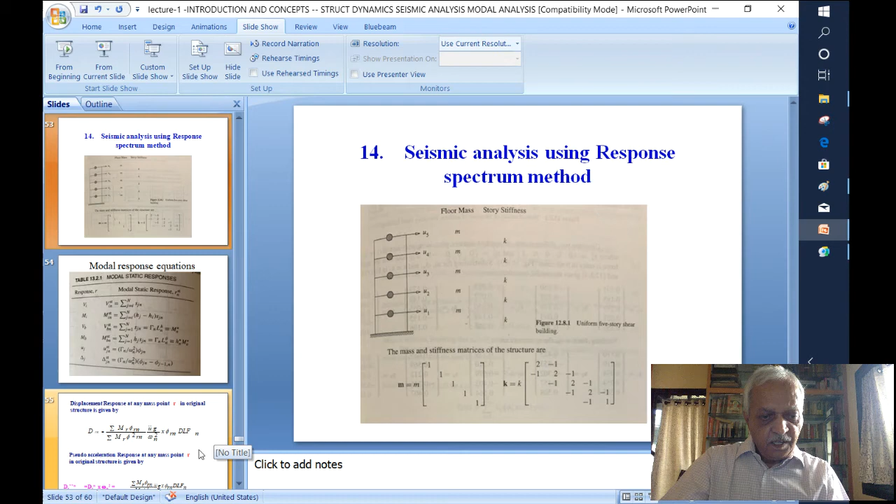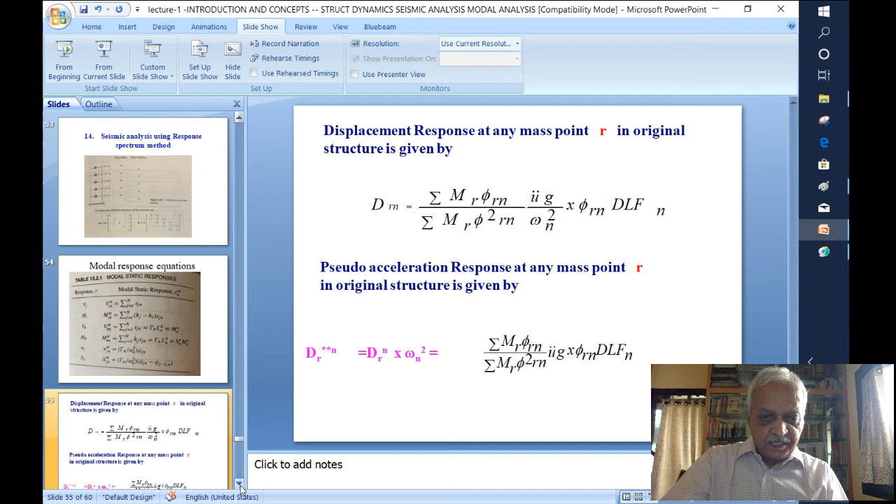Now we have the same system which we have considered earlier, a 5-story frame with equal masses and equal stiffnesses at each floor. I have the mass matrix, the stiffness matrix, and now I have already got the free vibration characteristics. Having got those, we now have equations which give rise to calculations for maximum displacement, maximum pseudo acceleration or pseudo velocity, and finally the pseudo inertia force.

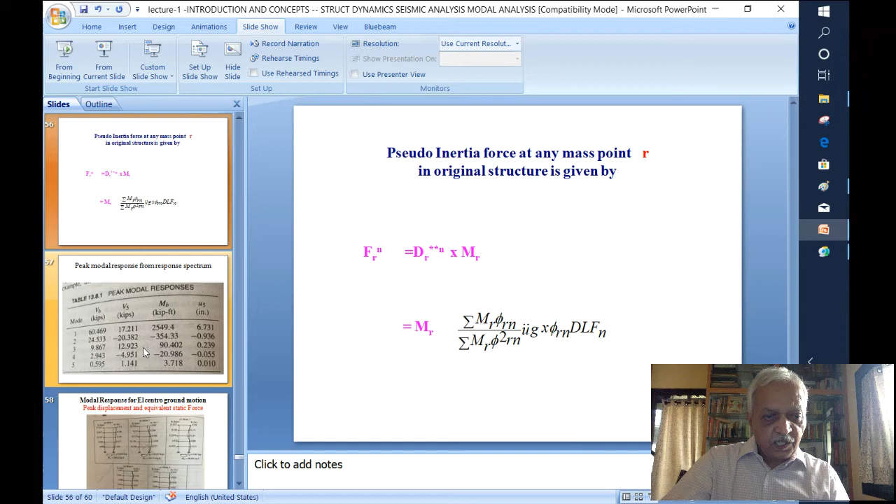So we need only the dynamic load factor from the response spectrum. We take those response spectrum values, and for each mode we work out the responses. So we say that peak modal responses are obtained.

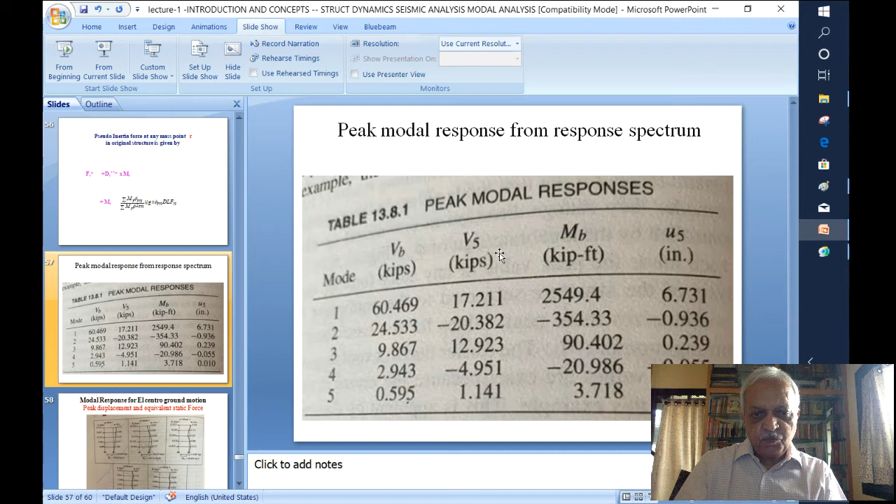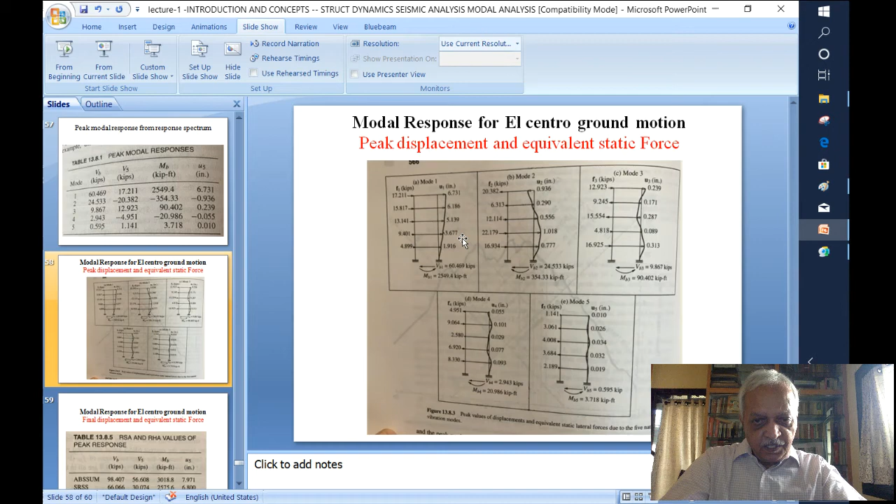For the first mode, second mode, third mode, and so on, I work out the displacement at mass point 5, the bending moment at the base, the shear force at the base, and the shear force at the topmost point, the fifth floor. We consider all these peak modal responses and then determine the total response. Now this variation is indicated graphically here.

In this particular case, if you have a look, we have got the overturning moment at the base, the maximum displacement at different floor levels, and the shear force at each floor level.

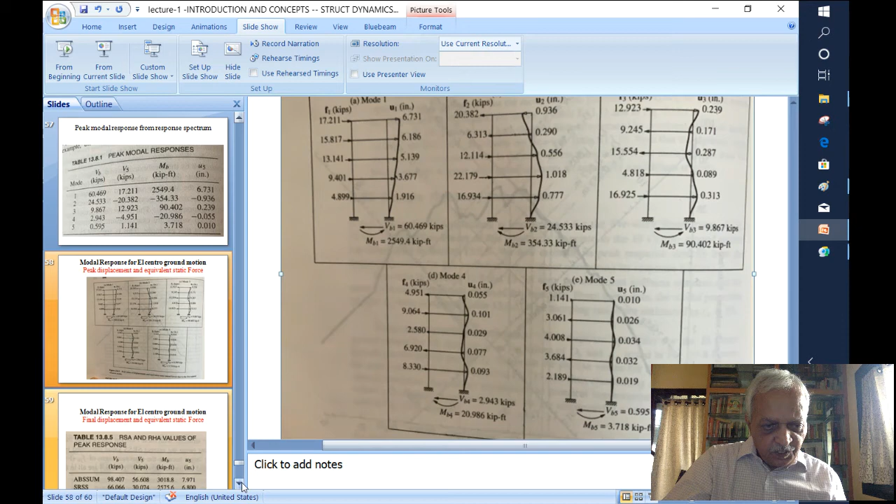Likewise for the first, second, third, fourth, and fifth modes, all the responses are worked out. Those responses are the story shear, the displacement, the base shear, and the overturning moment. So for each mode we have all these responses, which are later added to get the total response.

Now I want to add all these modal values to finally get the resultant response. There are various schemes of addition. One is the absolute sum, irrespective of sign, whether plus or minus—you add them all assuming they are all positive.

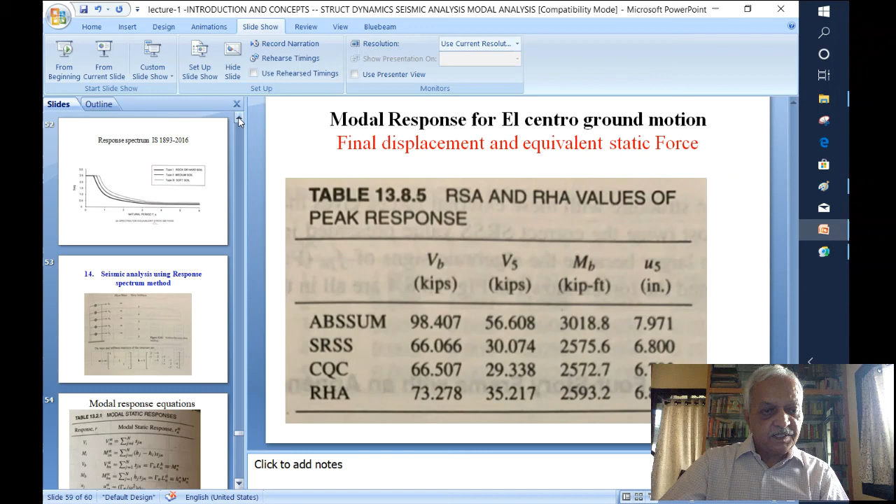So we see that these methods of addition are quite reliable and extensively followed. This response spectrum makes life quite easy—you need only the frequencies of vibration and the periods of vibration of the structure.

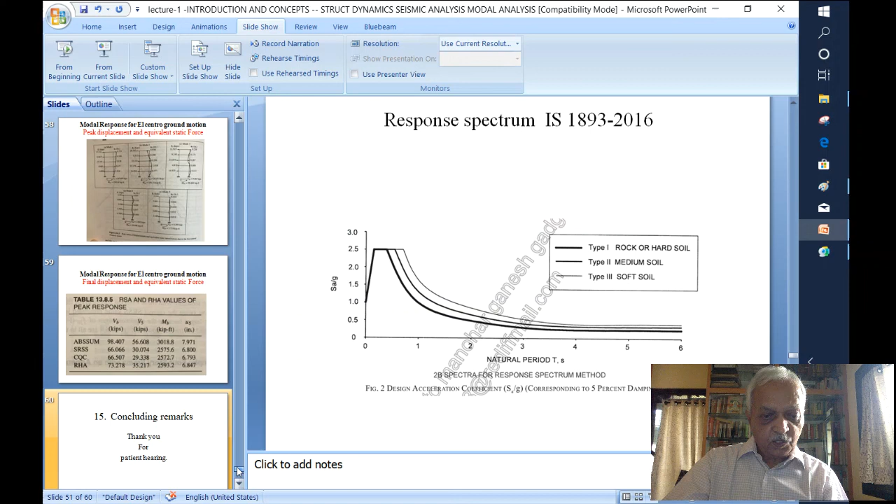Once the free vibration analysis is done, the response spectrum makes our job very simple, because it directly gives us the relationship between the period of vibration and the value of SA by G. So once we are sure about the free vibration characteristics, that is the period of vibration, the response spectrum is used to determine the total response of the given structure.

So we now come to the conclusion of the presentation, and we say that the response spectrum method, which is a very powerful and popular method, makes life easy, and it is all based upon the rational method of the response history analysis itself. Only thing is, not everyone is expected to do response history analysis, but you will only do the free vibration analysis and then use the efforts of others to finally determine the system.